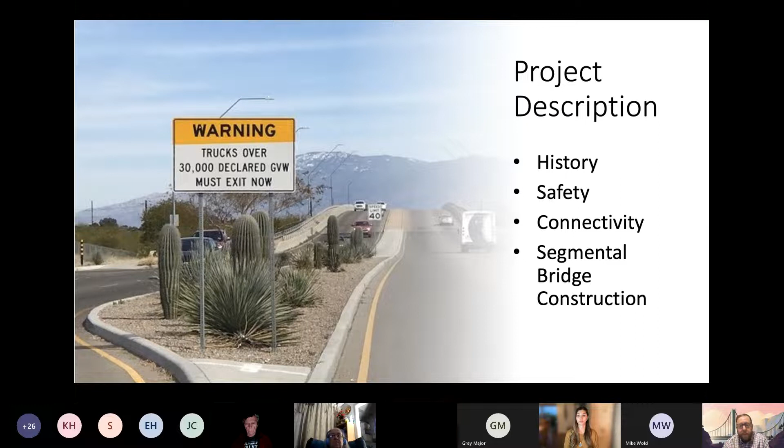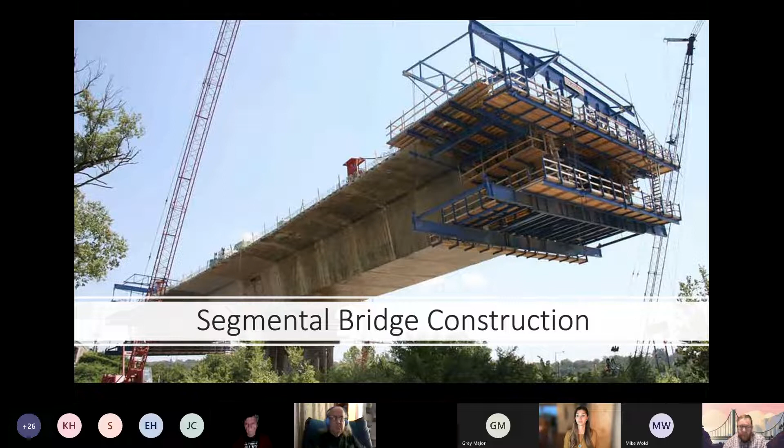And probably one of the most exciting things, since I'm a bridge engineer at heart, is that we're going to be building the second segmental bridge in Arizona, the first one being up near Mesa. But this is a very unique construction process for building bridges, and it's something that we're going to be proud of moving forward. So I'd like to turn it over to our segmental team, our OPS Constructors, and let them introduce themselves and go over what segmental bridge construction is going to be like for us.

Mike? All right, thanks, Austin. So my name is Mike Wold. I'm the project manager for Old Pueblo Segmental Constructors. Like Austin mentioned, we're a joint venture of two companies. The first being Malcom International. We're a construction company based out of California, specializing in technical bridge construction. Our folks have built technical bridges and these types of structures from coast to coast, including Hawaii and Canada. Most recently, a project right next door in New Mexico.

And we are partnered with KE&G Construction, a local Tucson-based company who's been doing business here for the last 50 years, specializing in heavy civil and utility construction. And combined, we have all the skills necessary to deliver a successful construction project for the city. Thanks, Mike.

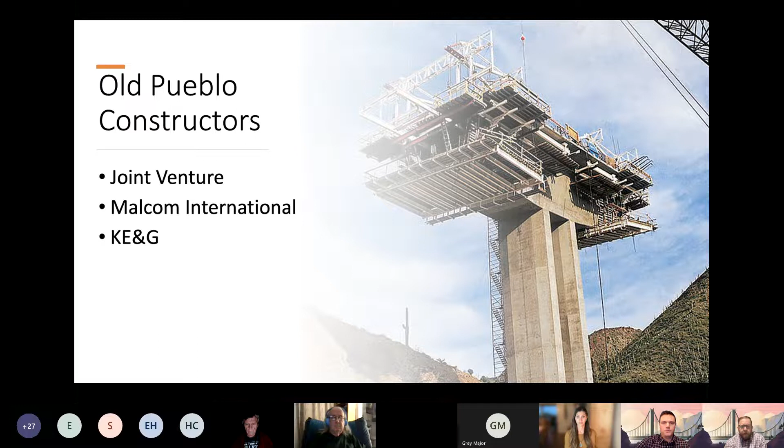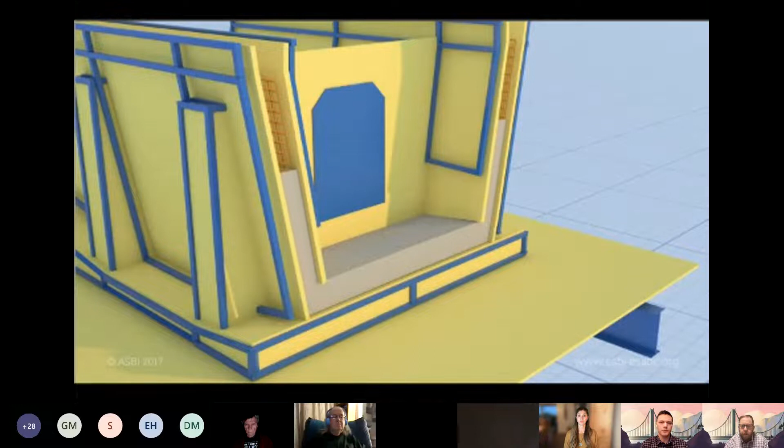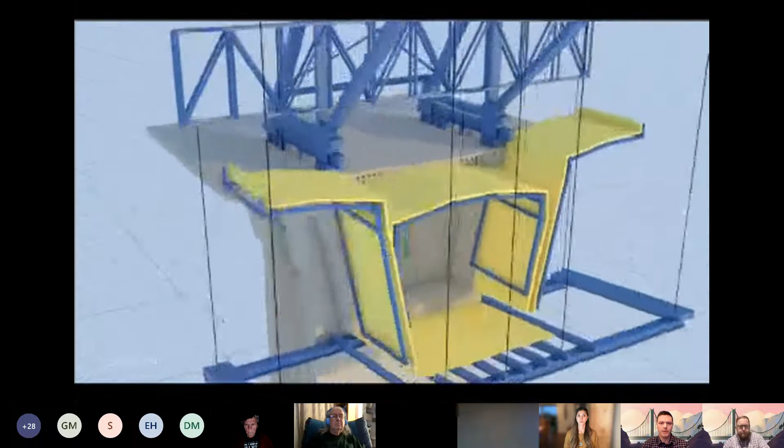So it all starts with the bridge foundation and the vertical pier. And then the first typical section of bridge superstructure, which we call the pier table, is built using conventional falsework and formwork similar to any other box girder type structure. On 22nd Street, these will be 40-foot long, will be cast in 3 pours, and they will support the form traveler system. So the form traveler system is the contraption that you see being assembled on the screen right now.

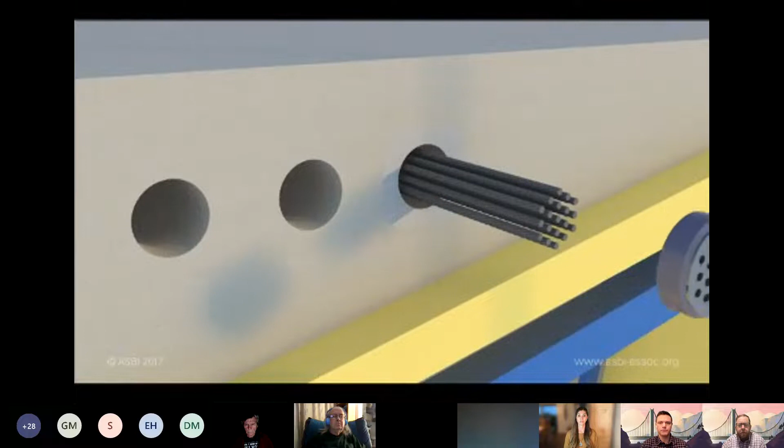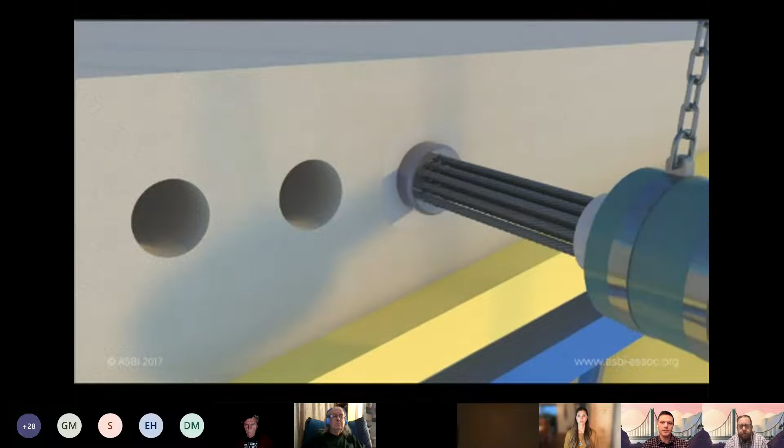It's mounted to the previously built section of the bridge, and it holds up the forms to build typical 16-foot segments. Each segment then has steel cables run through them, called post-tensioning tendons. The cables are anchored at each end and are stretched with a hydraulic ram, which compresses the bridge structure, sucks the new segment into the previously built section of bridge, and makes the bridge very sturdy.

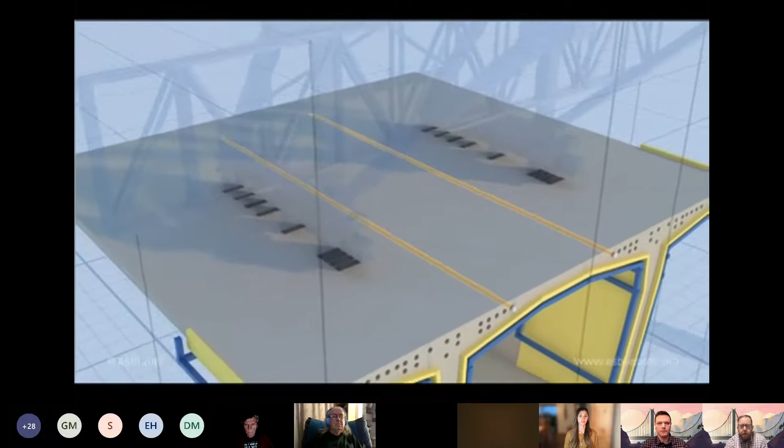And then every tendon will get filled full with grout, which protects the steel cables from corrosion. So once the segment is cast and post-tensioned, then the form traveler is advanced on rails, and a new typical 16-foot segment is cast.

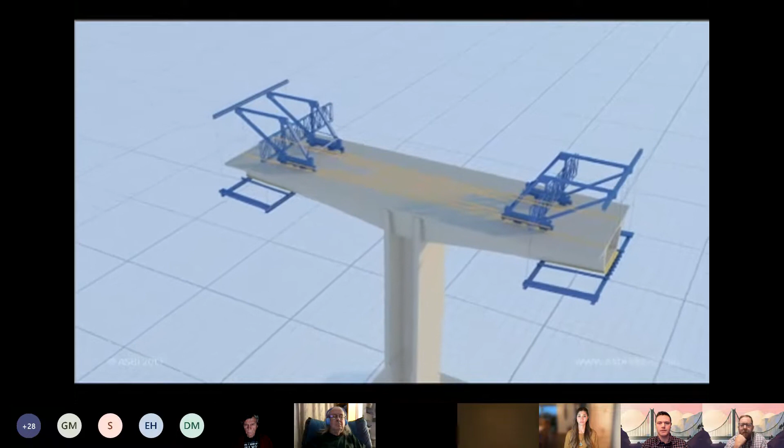And then you can see the cantilever being advanced; the segments are always being cast on opposite ends of the cantilever. It keeps that structure balanced and minimizes the loads going down through the pier table into the foundation.

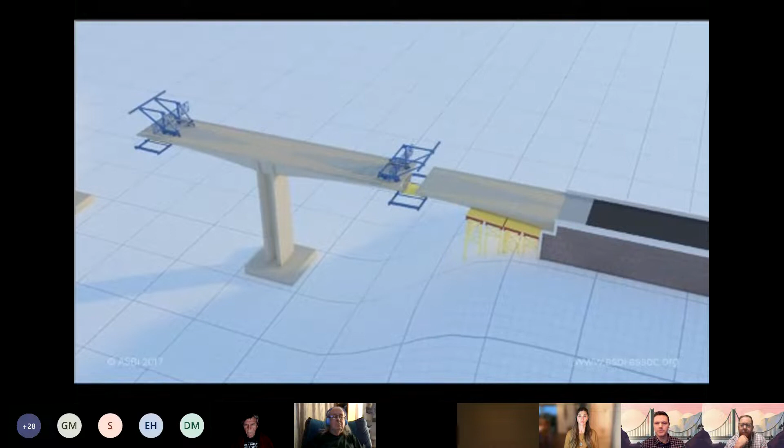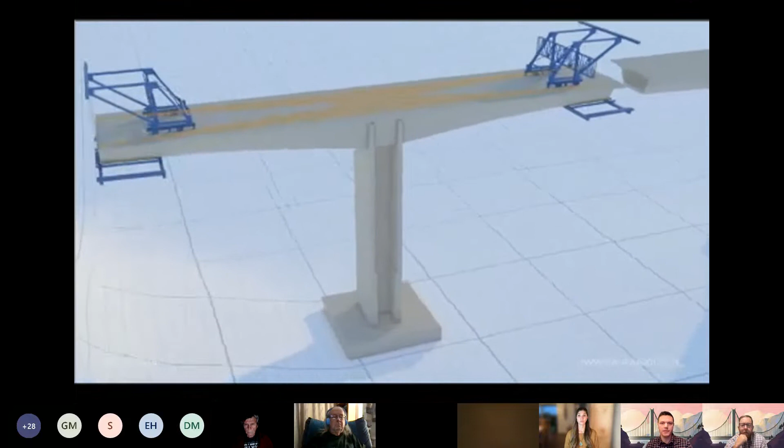And then at the abutments, there's an end span, which is also built on conventional falsework. And then the sections are stitched together in a closure pour, and the whole span post-tensioned. See the process being repeated on the next cantilever. The advantages of this method are that it's very low impact to the ground below.

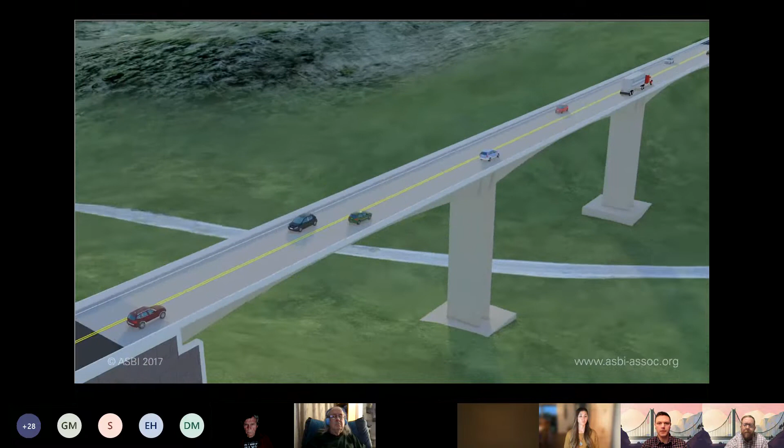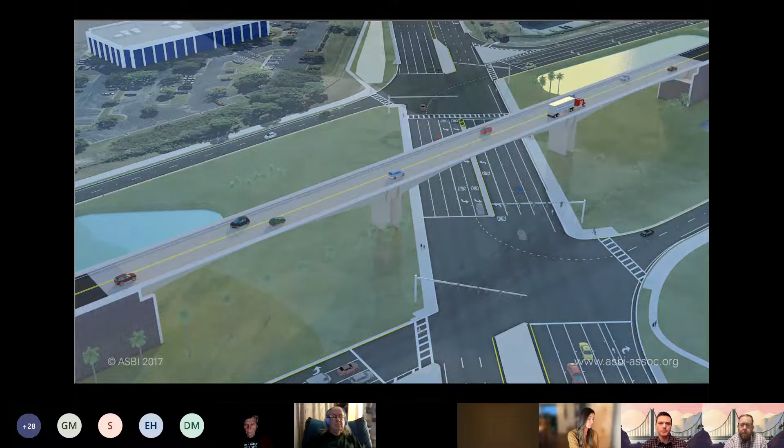After the whole bridge is complete and the barriers are installed, it can be open to traffic. But again, it's very low impact. It's a great method for building over railroads, highways, any other body of water. So the work is totally contained overhead. And again, it just reduces the impact to everything that's happening below.

And with that, this has been such a long project. As we got our construction manager at risk on board, we've been working over the last year developing the most efficient ways to bring this project to fruition. And we've made a few changes, and I think the biggest one, I consider kind of the soul of the bridge project, was the pedestrian access and the pedestrian bridge.

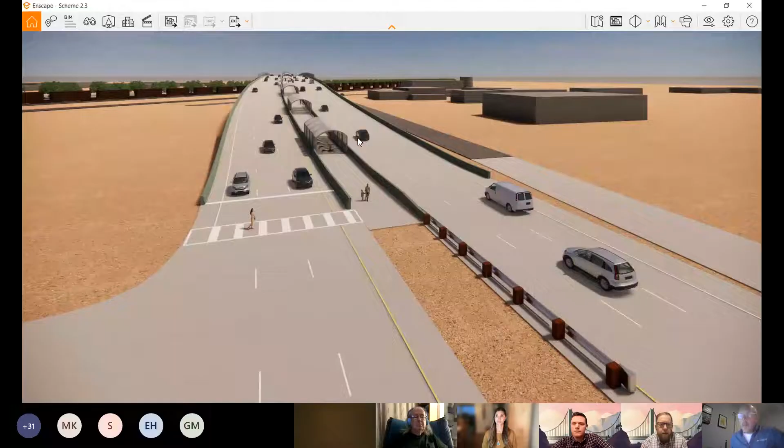You bet. I will stop presenting. Can you see the model? There we go. Perfect. Excellent. So we're on the west side right now in the model. Do you want me to move through it a little bit? Yeah, that'd be fine. You can go and I'll discuss a bit.

So right here we can see that we have a crosswalk that's going north, and one of the key aspects of getting pedestrians across the bridge and onto their routes was to keep the pedestrian bridge in the middle of the two structures, but then provide HAWK accesses on either side of the bridge to safely move pedestrians through this facility. And you can kind of see the intent going up and over. It's protected both. You can go ahead and go up and over, Paul. Okay.

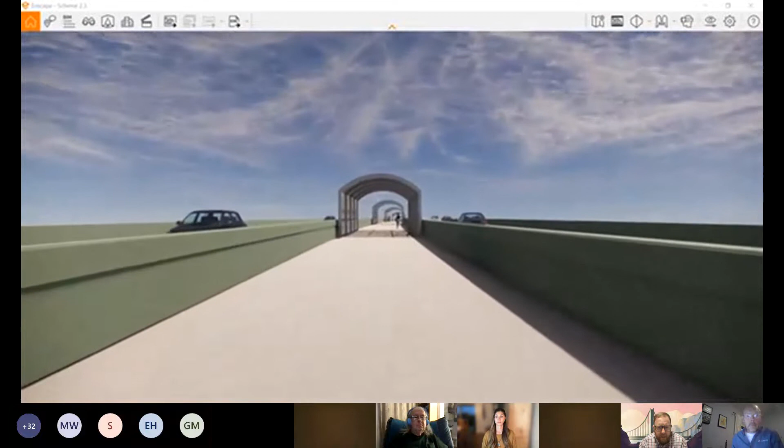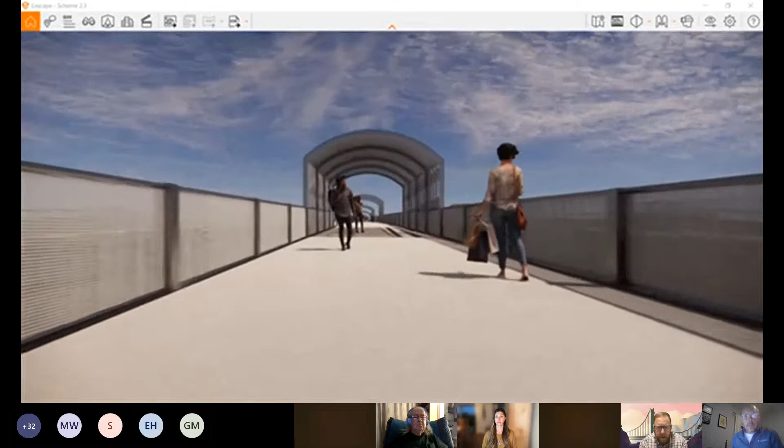Spacing these shade structures out throughout the length of the bridge was intended so that we could have reprieve from the long walk or the long ride across these bridges. They're over 1,000 feet long, and from HAWK to HAWK it's roughly 2,500 feet, so it's gonna take a while for folks to get across. So we really wanted to make sure that we provided a safe place for people to take refuge if it is in the middle of the summertime.

The panels in the shade structures were provided and designed by our artist that was involved at the very beginning. We've replicated the panel work throughout, and we're hoping to really highlight the design aspect of that.

And if we go, we can move up and fly over and take a look at the next portion there. As you can see, we're moving our way towards Plumer there to the north of 22nd Street on your left-hand side. And then on your right-hand side, Wilson Avenue is going to be reconnected to 22nd Street as a part of the original design assumptions.

The congestion within ramps that move from Aviation to 22nd Street created a bottleneck in an unsafe area. So that was actually changed to a cul-de-sac, and with some of our design changes, we're able to actually create a safer space and reconnect Wilson Avenue to 22nd Street. And that HAWK will be there to create a rather large pedestrian crossing.

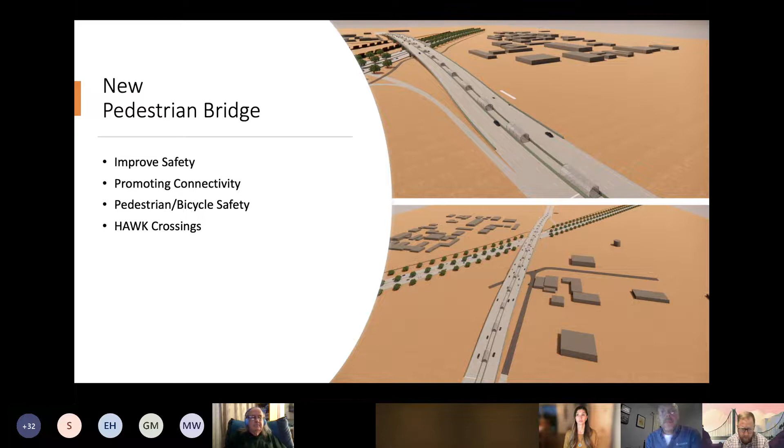I want to now turn it over to Erica, and she can discuss how we're moving forward with the community outreach. Yeah, hello again, Erica Frizella. So one of our jobs is to keep the community aware of this project as it progresses. And we do that in multiple ways. So we are sending out news releases, notification letters to those homes and businesses around the area, message boards.

You may have seen we shared this public meeting via the message boards on 22nd Street, as well as public meetings. So we have a sign-in sheet in the chat. If you would include your name and email address, that allows you to be on our listserv. And that way we can get you our notification letters, our news releases, and any updates on the project quickly and as soon as they come up.

We also have a project website. So if you scan that QR code, I'll also put the link in the chat as well, so it's easy to access. And on there, we will update with any documentation, any information, and updates on the project as it progresses. And then we also get a lot of information out on our social media. So if that's the easiest way for you to follow along, those are our social media handles. And there's always great pictures and updates on there as well.

I also want to introduce Michael Graham. Thanks, Erica. Mike Graham here. I work with Erica in the strategic communications division within the transportation and mobility department with the city of Tucson. And I really don't have anything else to add, Erica. Yeah, so with that, follow us and we will do our best to share information throughout this project with all of you. And from here, I'm going to send it over to our Main Street Business Assistance Program, Britton and Steve.

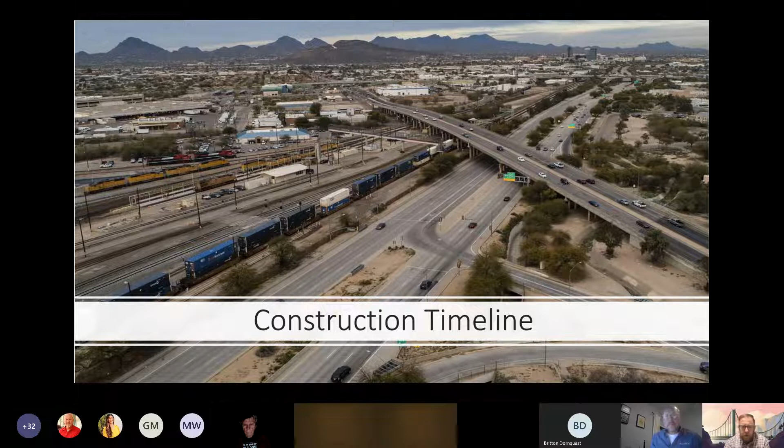So the big thing most of you are probably curious and want to know about is the construction timeline and when we anticipate getting started. I'll shortly here turn it back over to Mike to go through the phasing aspects of it. They have another pretty neat little video that shows it all, but we're looking to start construction in the spring of '23. It's roughly a 2.5 to 3 year project.

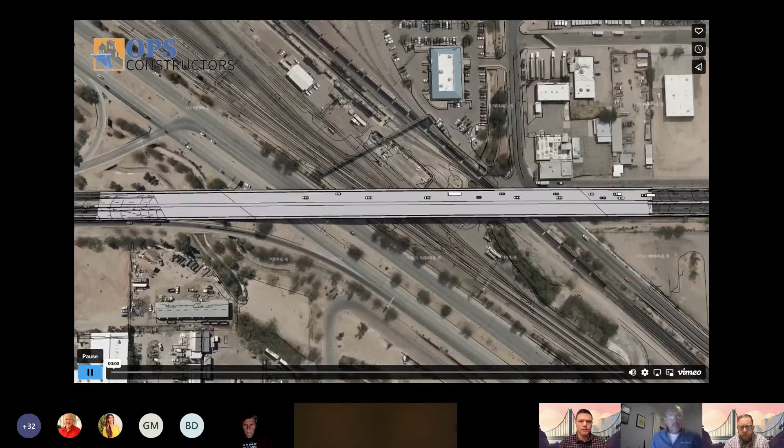And Mike, cue up your video and just let me know if you want to stop and discuss anything. Yeah, all right. Thanks, Austin. Let's go ahead and run through the sequencing. Another video, not quite as polished as that first one, but this will give you a real customized view of how we're going to operate on 22nd Street. So pictured here, we're looking west, is the existing bridge. So go ahead and press play, Austin.

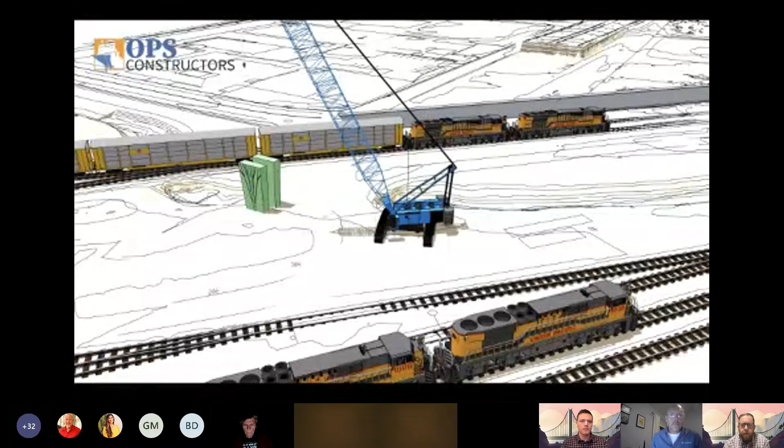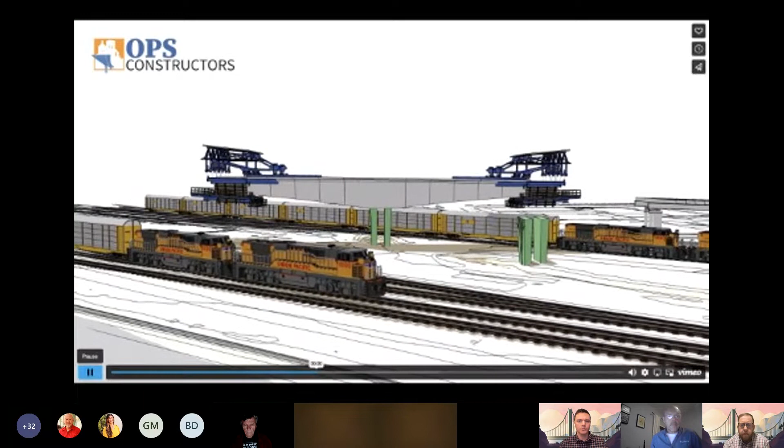So the first thing that we're going to do is the existing bridge is going to be demolished, and then we will start the new construction inside the Union Pacific Yard on the pier tables to start working on the new eastbound bridge. You see again that balanced cantilever construction. This is Pier 2 inside the Union Pacific Yard. So concurrently, we'll be working on Pier 3, also on the eastbound bridge and the end spans.

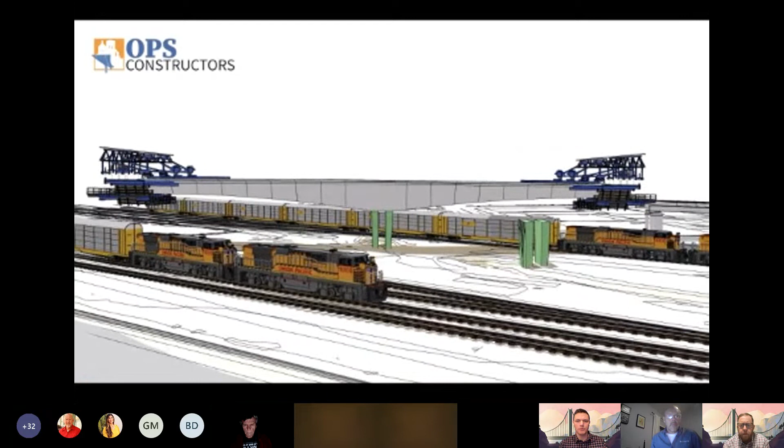We'll also be working on the pier tables for the westbound bridge. Here in just a second, you'll see the pier tables pop up. And once the segments are complete on the eastbound bridge and the closures are tied in, then the travelers will move over to the westbound bridges, and we'll start building the segments on the westbound bridges.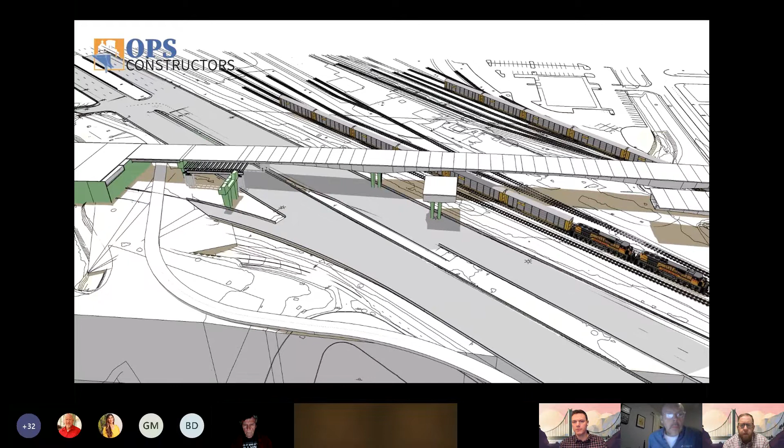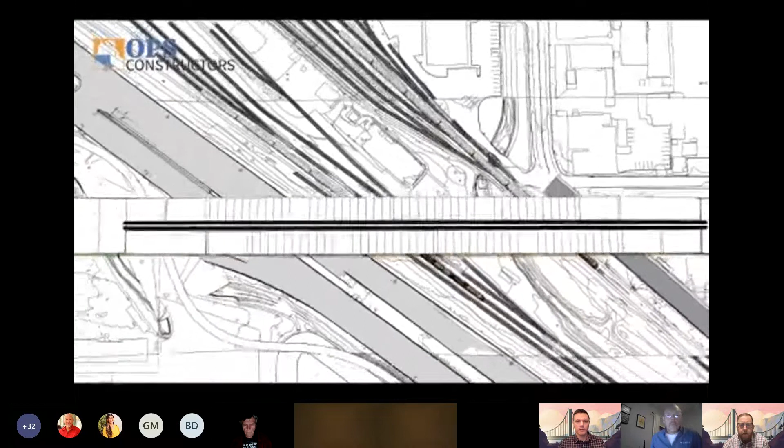And once both vehicle bridges are complete, we'll come in and erect the pedestrian bridge in between. We have a little bit of a dated rendering on the pedestrian bridge. It will be the intermittent shade structures like we went through in the previous model view. But that's the overall sequence of operations on how the construction is going to unfold on 22nd Street.

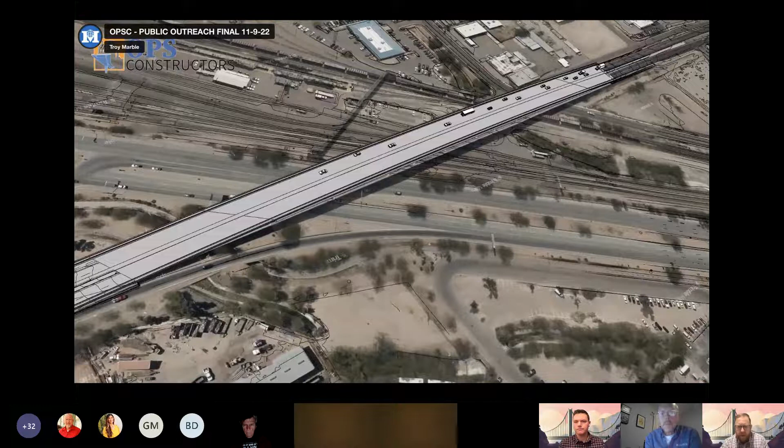Thanks, Mike. Yeah, and one of the big things that allows us to build and construct this project in the time frame that we discussed, 2.5 to 3 years, is the bridge closure. And the biggest thing about that was trying to be as efficient and as safe as possible constructing these bridges in and around the Union Pacific Rail Yard over Aviation.

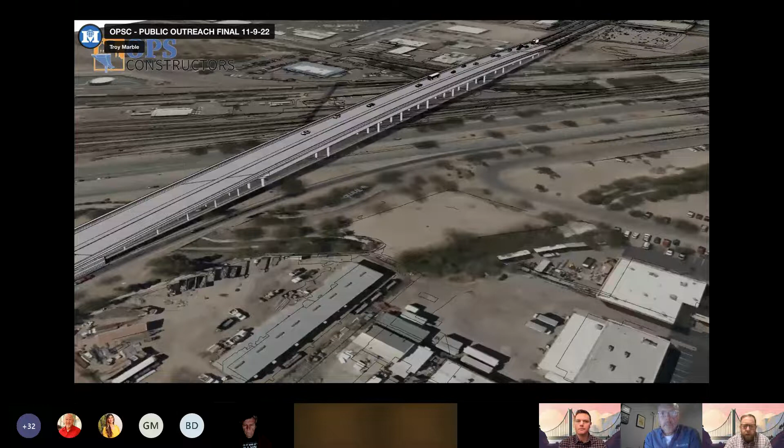We've done a lot of analysis and discussion on what that's going to look like, and we have a detour map, and we'll have a lot more information as we move forward. We'll be working hand in hand with the Main Street folks on business questions related to these detour maps. We'll be able to provide specific routes and assistance in that manner with them.

Getting the bridge out of the way also takes that bridge that is currently load rated, load restricted, out of service, and just provides a safer environment for our constructors to build this and get it done and open back up as soon as we can.

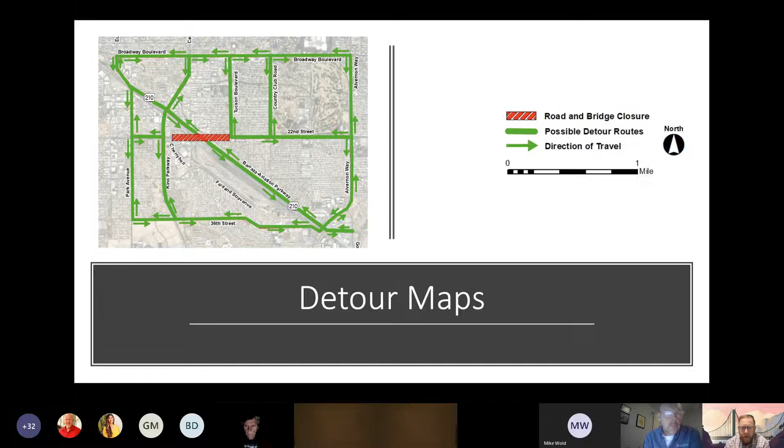We do have some contact information here. Again, I'm Austin Westnetzer. I'm the project manager. You met Eric and Michael, and then we also have Steve and Brenton's information here as well.

We are going to have additional public meetings tomorrow night at 900 South Randolph Way at 5:30 to 6:30. And then once we return after the holiday, December 6th at the First Assembly of God, during the lunch hour to provide accessibility for folks who aren't able to attend after work. And then the final one will be December 8th. That'll be another evening meeting.

And then as we progress through the holidays and we get nearer to construction, we will be hosting a public pre-construction open house to really go into the final details and show exactly what things are going to look like and when construction's going to begin. Other than that, I think we're done. So if we have questions, Erica, do you want to?

Yeah, we have some questions in the chat. First one from Michael: What happened to the plan with a grade separated pedestrian facility that was connected to the Aviation bikeway? This version will not be an improvement to the existing sidewalk.

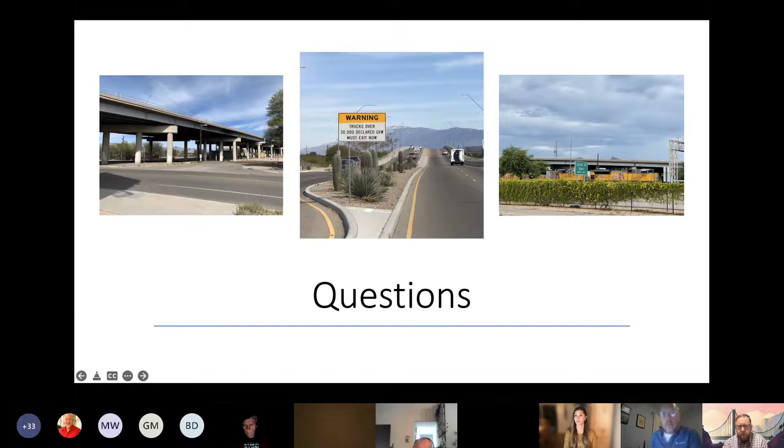Next is more of a comment back to his earlier question. Michael: Plummer does have pedestrian access to 22nd. Yeah, correct. You have to cross the ramp in order to get to it. So we'll have a direct, and maybe Paul, I'm going to stop presenting. Can you bring up your model, please?

Yep, there it is. So Plummer will now have that direct connection to 22nd Street, and then we're still working on some of the detailing of the HAWK crossing there, but we believe that HAWK crossing is going to extend clear across 22nd Street. So the existing paths that are on the north side of 22nd Street there will be able to connect pedestrians to that crossing and onto the bridge.

Thank you. From Michael, if this project is receiving a RAISE grant, why are pedestrian features being removed to reduce the cost? We're not removing the features. We still have the bike and ped bridge, and that's a key part of this project, is providing that connectivity. And Paul, if you could scroll around, it's okay.

The uniqueness of the original pedestrian bridge was that it was in the middle, and it did connect down to the path, and we still have that connectivity along Wilson, and then as well as the same path on the east end or the west end of the project. And instead of having to ride down a switchback of stairs, you'll be able to just connect along the center of the roadway here.

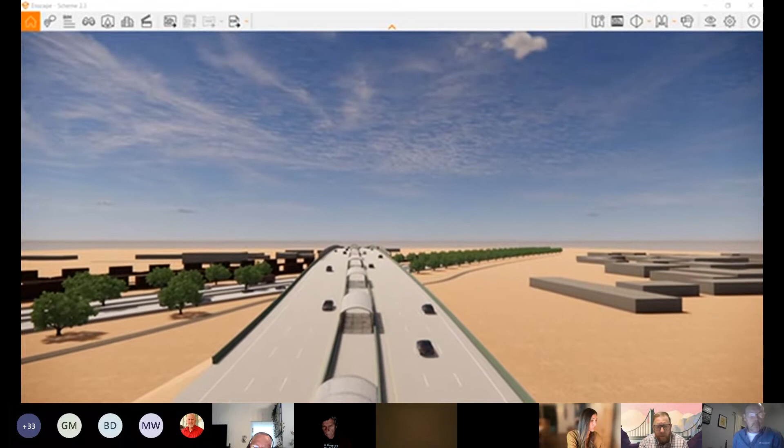Next question from Lori Lance. How will access to Cherry Bell and the main post office be maintained? So we're currently evaluating how we're going to handle the traffic during the closure, and to not create a cul-de-sac in which vehicles can't back their way out or get out of if they've gone too far on 22nd Street. So that'll be part of our traffic control plan. And as we move closer to construction, we're going to be working through a lot of those details to make sure that those types of concerns are addressed.

Thank you. From Jose, is this bridge going to have any art display or any other beautification opportunities? Yeah, so the pedestrian shade structures right now currently maintain the same artwork that was initially designed for the project. And I believe that we actually are going to have some more opportunities on the west end or on the east end to provide more opportunities for some type of artwork. And as we move closer to construction and work out some of the final details on that, then we'll be able to reach out to our community and get some involvement and some input on them.

Thank you. This one maybe for Britton and Steve, from Jose. How are you all helping the businesses that will be impacted during the next 3 years around that area? Yeah, thanks. There's a lot of things that we provide within our services. Again, going back to every business is unique in terms of what they need. There'll be businesses that will have some reduction in their cash flow, i.e. their revenue. Other people will not. So it is unique for each individual business.